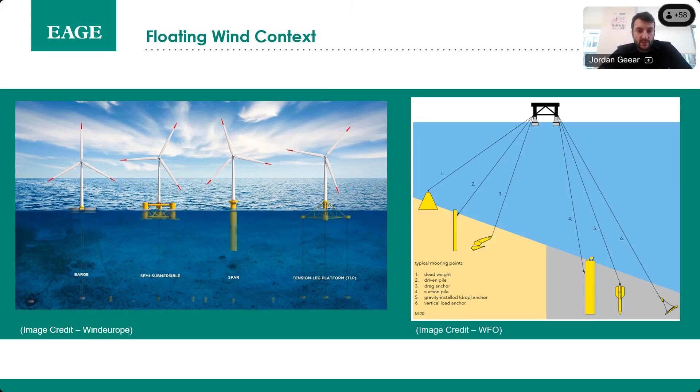So what are the specific challenges for characterization of the ground for floating wind? Potentially there's much greater heterogeneity in the ground conditions over a mooring footprint than there would be over, say, a typical jacket footprint for fixed wind. There's also a significant increase in the numbers of individual foundations or anchors, relative to piles for fixed wind, and these are much further apart than they would be for the equivalent fixed wind. As mentioned, there's significant optionality seen in mooring configuration, mooring radius, and anchor type, and this is only potentially going to be defined well into FEED or detailed design, so late project stages, and therefore specific infrastructure locations will not necessarily be fixed until later in the project, at which point it becomes more program-critical to plan the GI and execute it efficiently.

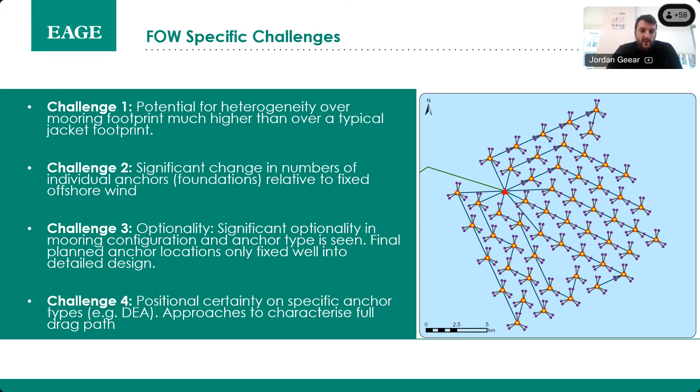There's also potentially more limited positional certainty with specific anchor concepts. So anchor concepts such as drag embedded anchors, DEAs, have a drag path over which the anchor is installed, and there's a need to characterize large volumes of ground to fully characterize, for instance, these drag paths, or volumes of ground for anchors that have lower positional certainty during installation.

There's also a challenge around existing best practice in the industry and how this relates to scaling of projects. Most of the existing best practice for geotechnical site investigation for floating offshore wind is conceived from existing oil and gas experience. There is developing best practice, certification body recommended practices that are looking at this as part of industry projects.

However, the current written recommended practices typically advocate an anchor-specific approach. So the number of exploratory holes or cone penetration tests that are conducted to characterize the ground at anchor locations are dependent on soil variability across the anchor pattern, according to the current standards.

These recommended practices typically advocate either one borehole or one cone penetration test per anchor in areas of high potential geological variability. Potentially, if we can determine that an anchor cluster - a pair of anchors or multiple anchors within a cluster - is in an area of lower geological variability, we could adopt one borehole or one in situ test per cluster, supported by the ground model, which characterizes the ground conditions over that cluster and confirms limited geological variability over that body of ground.

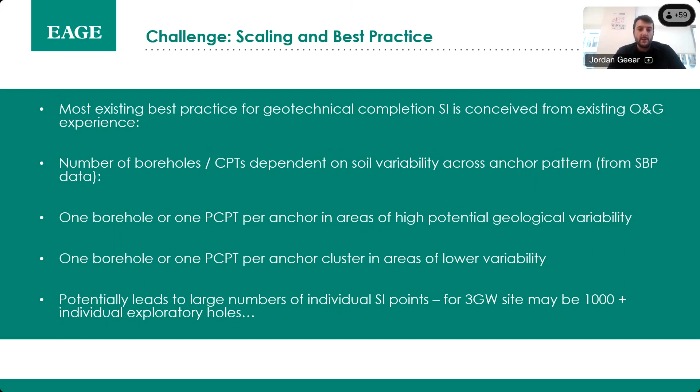Touching upon heterogeneity in the ground conditions: for floating wind, there's a large number of individual anchor points and individual substructures, if you like, versus fixed wind. Within, say, a typical jacket substructure, we'd be interested in ground variability over a 30 metre by 30 metre area, or up to 50 metres if we're looking at micrositing the structure.

Within a spread mooring footprint, we're interested in a 1 kilometre radius, which would potentially have 6 anchors within that radius. So we need to understand in great detail how the ground conditions vary over this footprint, and certainly over a cluster of anchors.

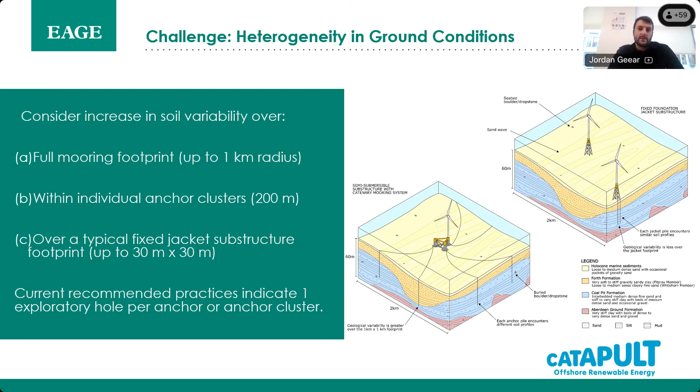I mentioned again optionality. What we're seeing with current floating wind projects is that significant optionality may exist in both the anchor layout and the inter-array cable layout until relatively late stages in the project, driven by the mooring layout and the analyses that inform this. Final layout may be defined late in the project, during FEED or detailed design, limiting the time available to plan, procure, and execute an anchor or cable route specific geotechnical survey.

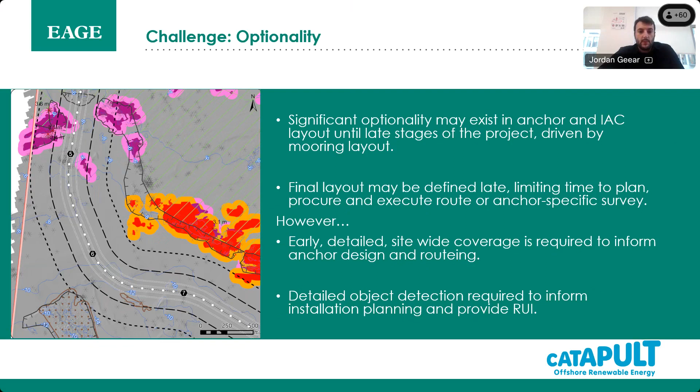So a lot of the potential solutions to this involve potentially greater reliance on the use of geophysical survey and ground models, to move away from large numbers of exploratory holes or in situ tests.

This approach would involve generating a detailed site-wide ground model at a relatively early stage, then extracting soil profiles at anchor locations using site-wide geophysical survey that's been calibrated at locations disparate to the anchor locations we're interested in. This may potentially be required to enable that optionality at a later stage and be resilient to changes in anchor location later on in the project.

Potentially, we could also look at reducing our reliance on physical sampling, which has potentially long lead times associated with laboratory testing, and focus more on in situ testing. We also need to be cognizant that, while project program and cost is a factor, we need to satisfy ourselves that the selected site characterization approach accommodates the project program while being appropriate to the level of ground risk and the project's tolerable level of ground risk in particular.

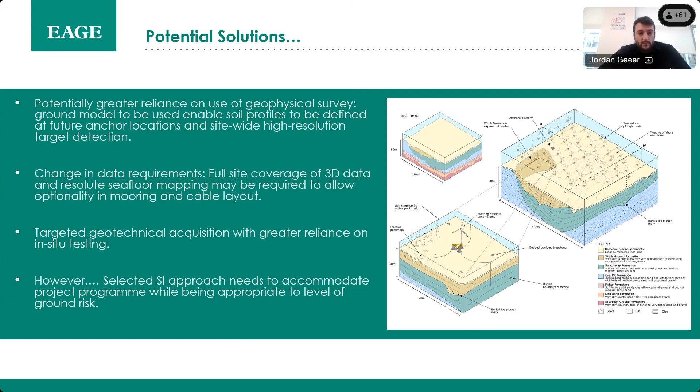So that was an introduction to general challenges. I'm now going to move on to presenting a summary of the site investigation anchoring MA17 project that was delivered on behalf of Offshore Renewable Energy Catapult, with the aim of investigating these challenges and developing potential solutions through a cost and risk assessment based approach to site investigation planning.

Before I start on that, I'd like to say a few words about the Floating Offshore Wind Centre of Excellence that initiated the project. This is a collaborative program between industry, stakeholder, academic and supply chain partners, aimed at accelerating floating wind projects, assisting with the commercialization of these projects, and supporting strategy around delivering net zero and driving economic growth.

This is achieved by developing a series of strategic programs in collaboration with Offshore Renewable Energy Catapult and the organisations shown on the right-hand side of the screen. This covers a number of different strategic programs such as mooring technology, substructures, dynamic cabling, environment, and supply chain. The MA17 project forms part of one particular program initiated by the Centre of Excellence.

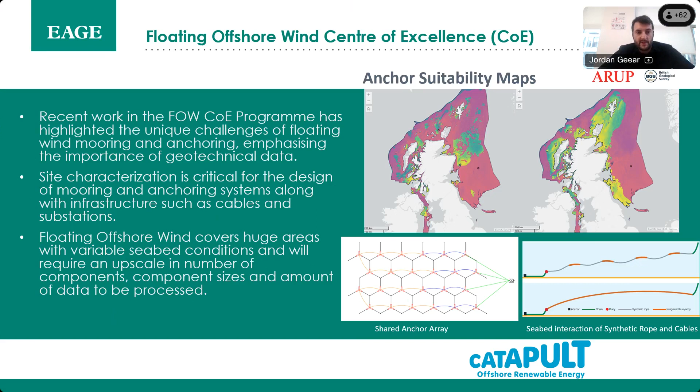So the scope of the MA17 project was to undertake a detailed site investigation method assessment to look at what methods are available for characterizing anchor locations and cables, scrutinizing the efficiency and practicality of those techniques, and undertaking a SWOT analysis of strengths, weaknesses, opportunities, threats for those methods. I won't focus so much on that aspect of the project today.

However, the other aspects of the project were to undertake a cost risk evaluation of different GI strategies, so assessing the balance between GI cost and the technical sufficiency of that to the project.

The project also looked at clarifying logistics, so understanding what vessel types were available in the market, the workability associated with the techniques, equipment costs associated with this, and project timelines.

This was done both for standard GI techniques, but also for novel site investigation techniques. We were particularly interested in looking at how novel techniques could assist in addressing these challenges, and aimed to clarify the understanding of those techniques and their limitations.

As part of the same project, we looked at a range of ground conditions associated with the UK continental shelf, and identified specific geohazards and geoconstraints that are relevant to those techniques and to SI planning for floating wind.

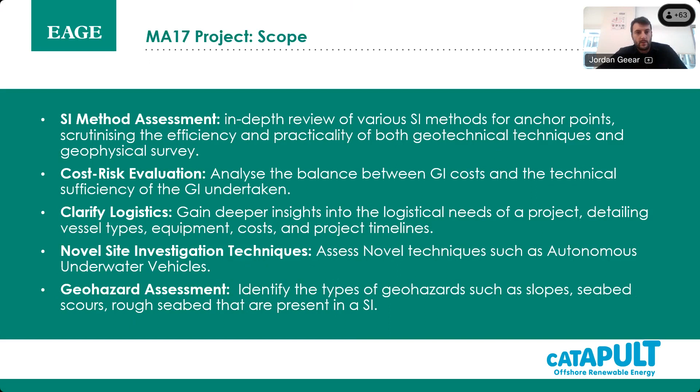So how did the project undertake this? The approach adopted was to develop a series of conceptual ground models and indicative anchor geometries for 5 hypothetical floating wind farm sites that represented different ranges of ground conditions across the UK continental shelf. The aim was to bound the range of ground conditions and look at different potential levels of ground risk, different geohazards, and also to look at sites representative of different anchor technologies and the site investigation requirements specific to those technologies.

At that point, there was an exercise in developing a series of strategies appropriate to each site, again covering different levels of risk, different program and cost levels. These range from anchor-specific GI through to approaches more reliant on the ground model and general site-wide characterization. The project also looked at minimum viable site investigation approaches and site investigation approaches specifically for TLP.

These strategies were then modelled to understand duration, cost, and weather workability of each strategy and each technique within that. They were also risk assessed with respect to technical risk and program risk, and this was then formulated into an overall cost program risk evaluation for each set of strategies.

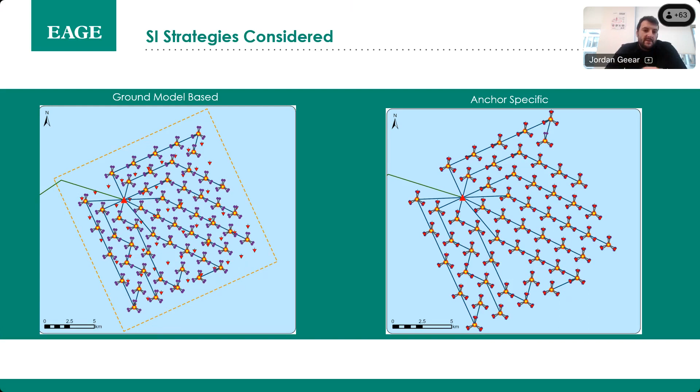Now, as an engineering geologist, I like to relate everything back to the outcrop. Another thing we looked at and bore in mind when doing this project was assessing the variability. As I mentioned, those conceptual ground models for each site were designed to represent different levels of variability in ground conditions and sensitivity to different anchor concepts.

So we looked at the range of conditions, from those that we expected to represent a low degree of variability in soil type, strength, and compressibility, to ground conditions where there was expected to be industry experience available to assess potential variability, including from oil and gas experience, and sites where there was expected to be more predictability in geotechnical properties.

At the other end of the spectrum, we have sites where there would be expected to be significant lateral variability in soil over mooring footprint, potentially active geohazard processes, and also low levels of experience previously in the industry with respect to anchoring techniques.

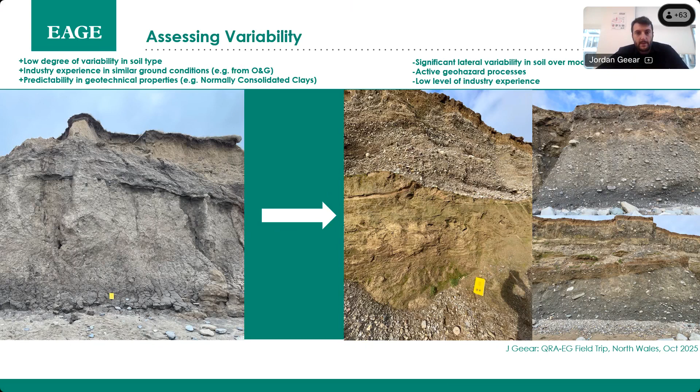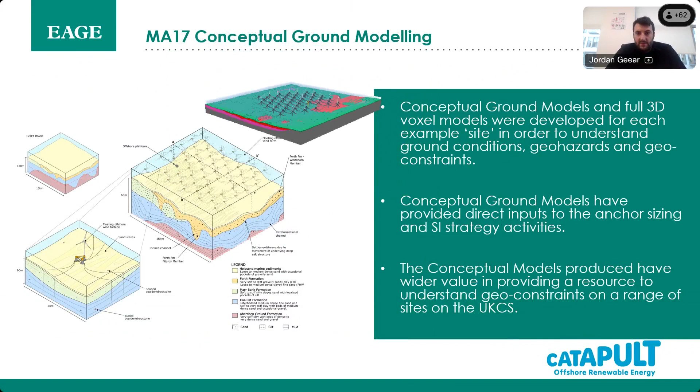So for each of these 5 sites, we developed a conceptual ground model shown on the left, so we could understand variability across both the site and the anchor footprint from a conceptual standpoint. We assigned indicative ranges of properties to that to enable anchors to be sized on a hypothetical basis to inform the study.

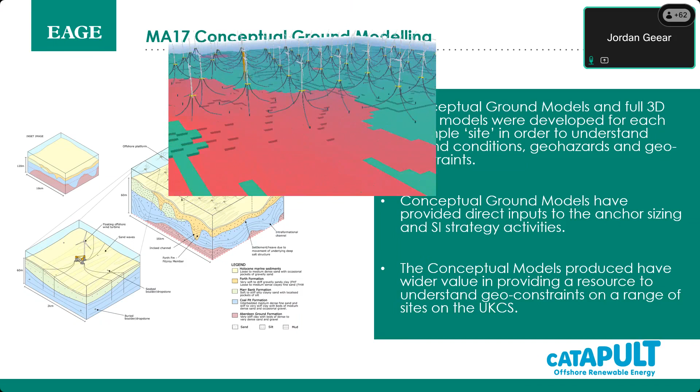We also developed a 3D voxel model for each site to enable that variability to be visualized as well. These conceptual models have both value in understanding the ground conditions for the study, but also I think they have a wider value in providing a resource to understand geoconstraints on the UK continental shelf.

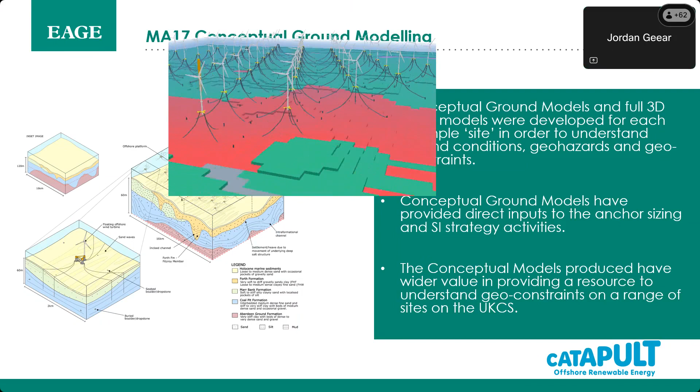In addition to development of the ground models, each site was assigned a hypothetical layout for a floating wind farm site, based around a 1 gigawatt floating offshore wind farm site. This was developed both for semi-sub and for TLP substructures over a range of metocean conditions, to allow visualization of exploratory hole and survey planning against the ground conditions as an input to cost-risk analysis.

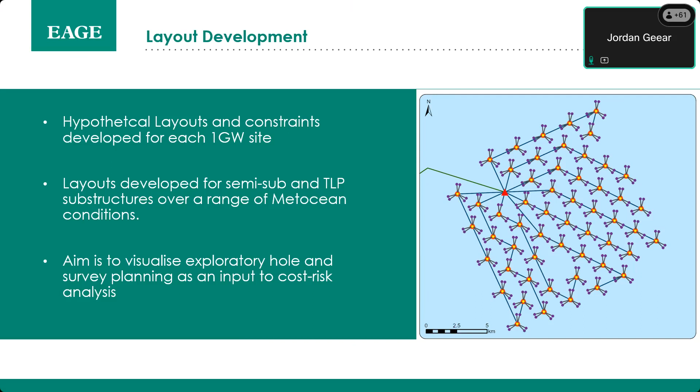So, as mentioned, the substructure type and the anchor concept has a significant impact on the ground investigation planning for floating wind, but also the point in the project program at which these are defined has an impact as well.

So if the project is able to define early on that, say, a tension leg platform approach is going to be used, then there's an opportunity to take a more site-specific approach early on and understand ground conditions at each cluster location in a similar manner to fixed offshore wind, with the borehole positioned in the centre of the anchor cluster and targeted to your 3D geophysical survey.

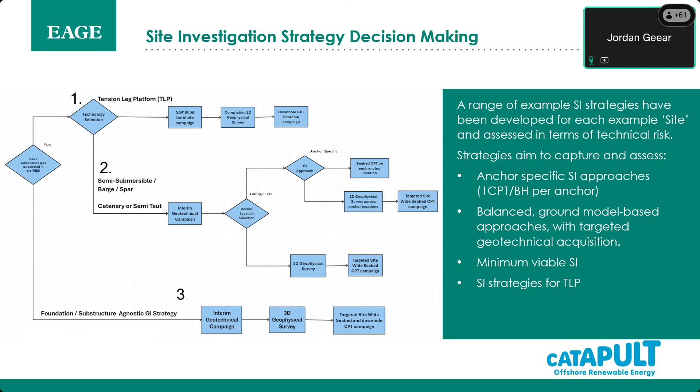So based on the experience of the ongoing projects at the moment, we've noted the following aspects of optionality that have informed this study: potential for changes in mooring radius, anchoring and anchor location at FEED or detailed design stage, and multiple substructure concepts being carried through, for instance at FEED stage, which results in more optionality.

Use of an EPCI approach, which means there's more requirement for the project to provide early GI information, to provide reliable information, and of course multiple anchor concepts being considered at late stages, which results in the GI needing to capture all of these anchoring approaches.

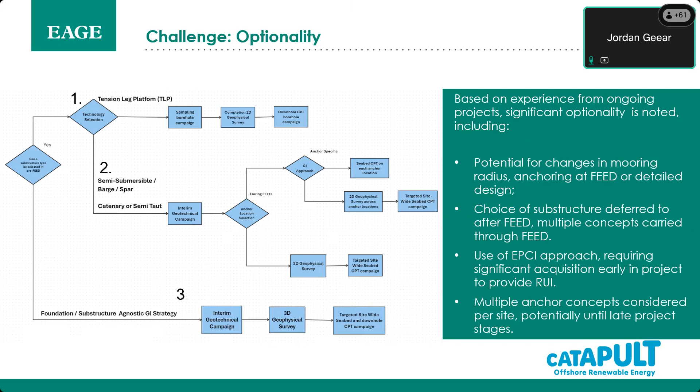So what are the solutions to that optionality with respect to the work done on MA17? Just to note that strategy is dependent both on program and decision gates, as well as ground conditions and ground risk.

Potentially seeing a lot of variation in mooring radius across these planned floating wind projects. Typically for the current UK continental shelf floating wind farm projects that are planned, we're looking at radii between 650 meters and 950 meters for the water depth we're expecting.

The mooring radius is defined later on, so we need a solution that enables us to plan GI and plan and design anchors that is able to deal with this uncertainty in location.

The overall approach will be dictated by the variability of the ground conditions and also the anchor sensitivity to this uncertainty, when we're considering a ground model-based approach rather than an anchor-specific one.

An underlying assumption of this project is that some level of physical data of each anchor location, be this geophysical or geotechnical, will be required to form more sensitive anchor concepts to enable design to proceed.

One potential solution that the project looked at is the efficiency of undertaking site-wide 3D UHRS, or EHRS to use the latest terminology, to allow ground profile definition of each anchor location while retaining optionality and maintaining a design program.

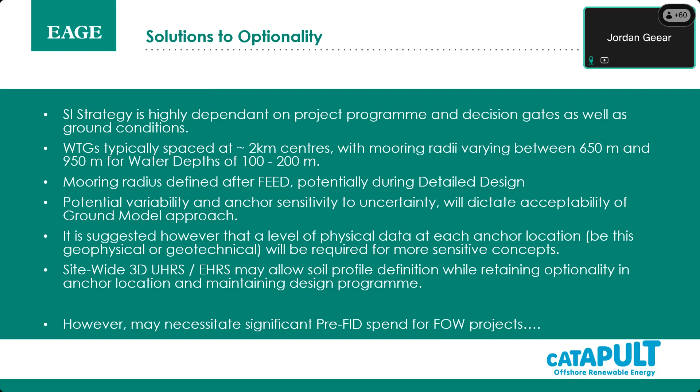However, acquiring this data on a site-wide basis early on in the project may necessitate significant pre-FID spend.

In terms of how the project programs that we've looked at have been risk assessed, GI overall needs to be proportionate to the level of geotechnical risk at the site to provide value for money and accommodate the project program.

This needs to be a balance between obtaining characterization in each geological unit when we're looking at a ground model-based approach, the ability of the ground model to provide sufficient information to enable design, and the sensitivity of the anchor and cable design to that variability. If we're able to satisfy these criteria while achieving an acceptable level of geotechnical risk management, then we can consider the site-wide GI approach.

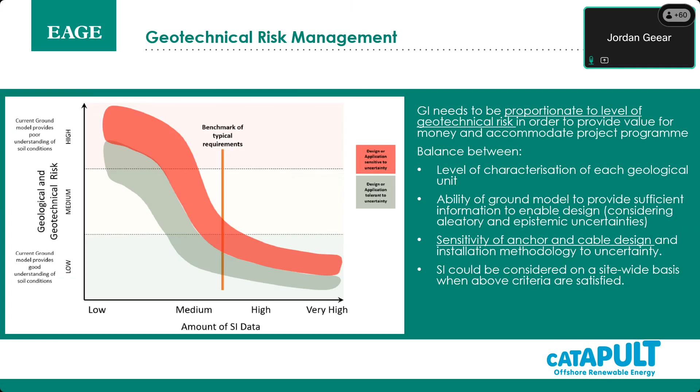So the overall high-level risk assessment approach on the project: a specific geotechnical risk register approach was developed in the project to enable this. This then defined ground variability in the context of those 5 sites.

It defined industry experience in those ground conditions, confidence level associated with the data that was collected, and sensitivity level of the anchor concept that was being considered for each site.

This was then fed into a risk matrix, and the SI approach was rated based on that. Higher risk sites were those where anchor-specific GI may be more appropriate, and low risk was where site-wide, ground-based GI approaches may be more appropriate.

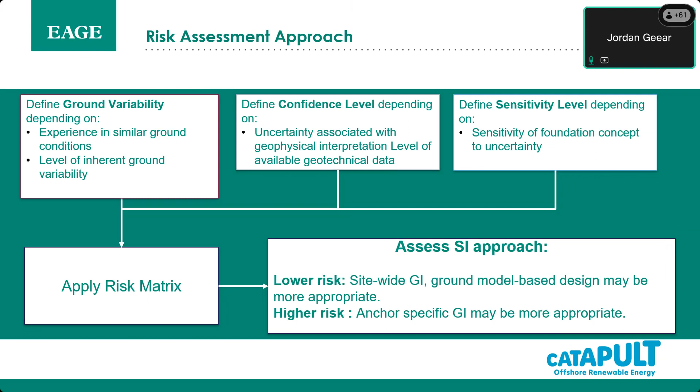I'd like to also give a bit of a shout out to this paper from ISFOG 2025, which, while being developed separately from this project, follows a very similar approach. So it's well worth a read.

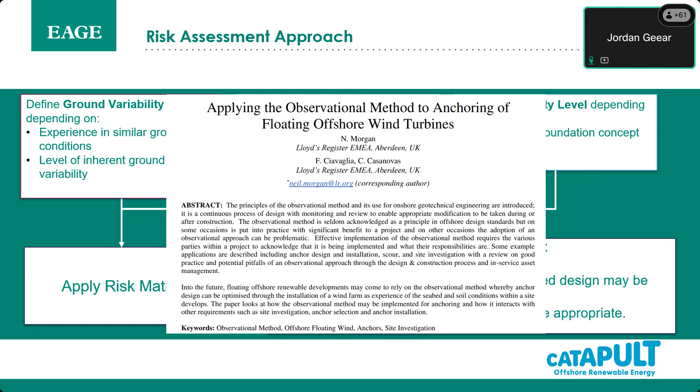This risk assessment approach is the one used for the MA17 project that was adopted. You can see this is broken down into sensitivity class, variability class, and uncertainty level, and this tripartite risk assessment approach forms the basis of that adopted on the project.

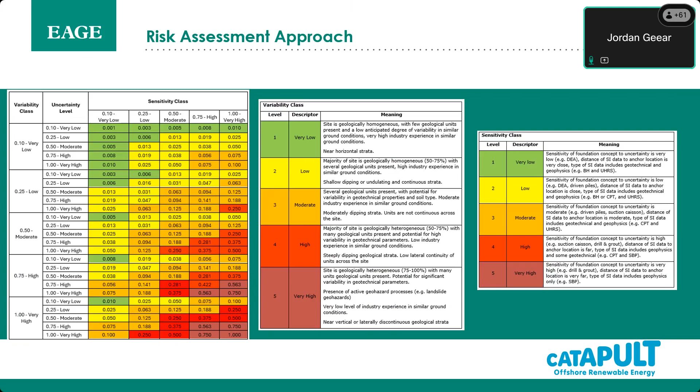Each of the techniques was analysed using Maritime's Optim software to look at program across a variety of start months and to analyse weather downtime estimates. Comparative assessments were then made between different techniques to look at the efficiency of using one technique over another, as well as putting these into the context of a project program.

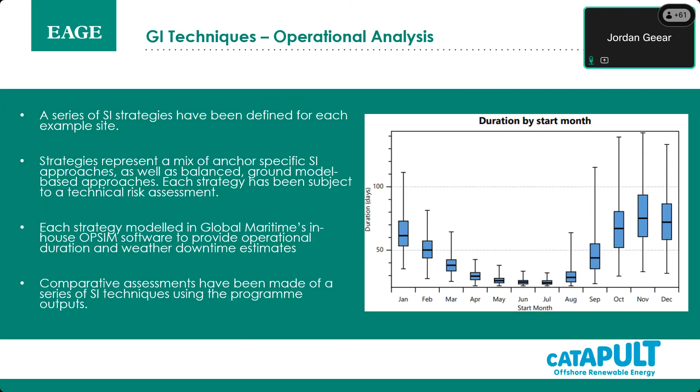One particular technique that was looked at, or problem that was assessed, was the need to understand seabed obstructions across the site, to look at the need for pre-clearance prior to cable burial.

Feedback we obtained on this was that objects as small as any size of boulder, so down to 0.2 meters, may represent obstructions to mechanical trenching depending on the lithology, and that there was a need to have optionality in cable route and data sufficient to plan cable routes with this in mind.

This necessitates quite detailed coverage essentially early on in the project. So we looked at the efficiency of using industry standard techniques such as side-scan sonar to characterize this, as well as synthetic aperture sonar and other more novel or emerging techniques.

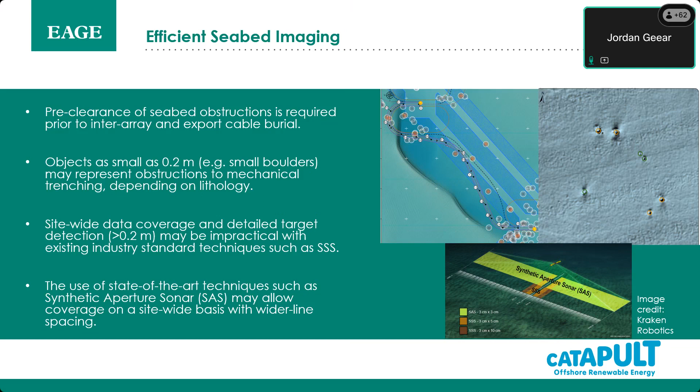So what you can see is that side-scan sonar is required at much tighter line spacing for the same resolution.

So we can compare based on the ability to detect a 0.2 meter diameter obstruction. This means a 600 kilohertz or 900 kilohertz side-scan sonar needs to run a fine line spacing, so 50 meters or less primary line spacing, versus synthetic aperture sonar, which can be run at potentially much wider line spacing, so 100 to 200 meter line spacing across the site.

What you can see from that plot is that the sail line spacing heavily influences duration, as you'd expect, and therefore the weather downtime as well. You can see that while side-scan sonar to obtain that site-wide coverage early on results in significant durations in the winter months, as you'd expect, the limiting line spacing by using that more emergent technique results in significantly shorter durations.

However, an aspect of this is that the use of synthetic aperture sonar results in much larger data volumes, and potentially the overall processing experience and software readiness level for that technique needs to be further developed in the industry outside of a small number of specialist contractors. As you can see, this also has a commensurate impact on cost.

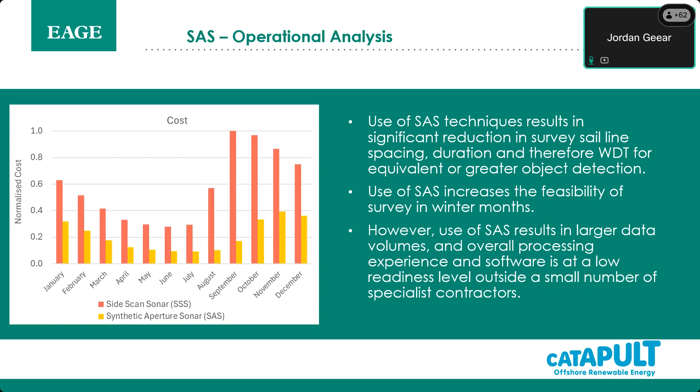As I say, that kind of fairly ground model-based approach, the use of site-wide 3D survey is of potentially significant benefit to enabling that approach in terms of understanding ground variability across anchor clusters, at the sort of turbine scale.

However, the industry standard 2D approaches introduce potential uncertainty between the lines through the mathematical interpretation required, which may limit the utility of this for the ground model-based approach to design and installation, unless your anchor concept is particularly insensitive to variability.

The full site approach provides resilience to layout change. It provides the opportunity to decouple the GI program from the definition of anchoring layout, and potentially to then take a ground model-based approach to design, which is decoupled from the site scaling program.

However, clearly there's a need to look at cost and efficiency of this technique. In the offshore industry to date, there's limited deployment of this technique at this particular scale, the site-wide scale.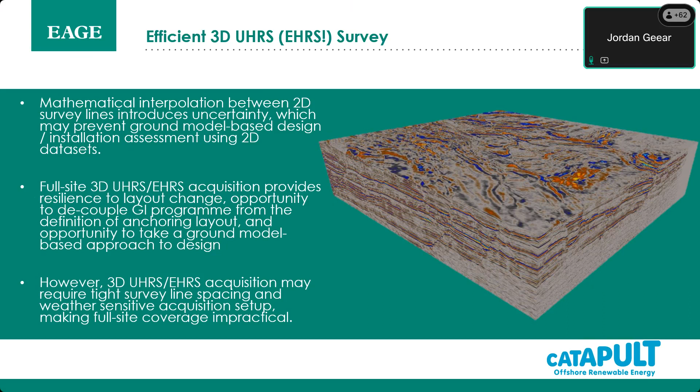What the comparison that was undertaken for the MA17 project was looking at is essentially a comparison of 3 different subsurface techniques: 2D single channel seismic, which is industry standard, and then what we term standard 3D UHRS approach using 2D survey vessels or assets.

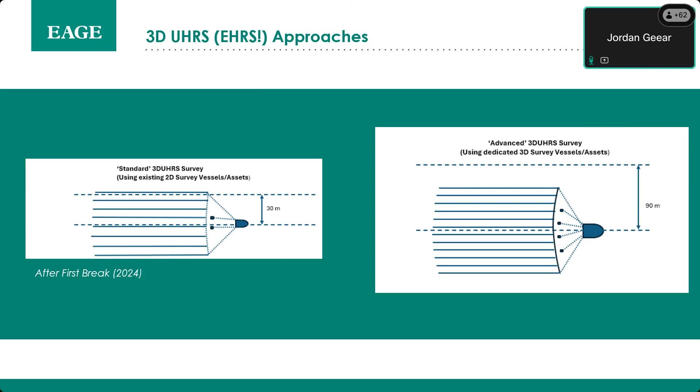So we've undertaken an option analysis looking at the comparison between these 3 approaches, using line spacings appropriate to each technique. For the 2D, we looked at a typical approach, characterizing with either 150 meters or 75 meters spaced primary lines across this 1 gigawatt site. We've looked at 30 meter spacing for industry standard 3D UHRS, and also looked at comparing with oil and gas 3D approaches.

The more industry standard 3D is associated with quite long durations for site-wide coverage, but this is likely more appropriate for dedicated survey and anchor locations if the project is taking that approach.

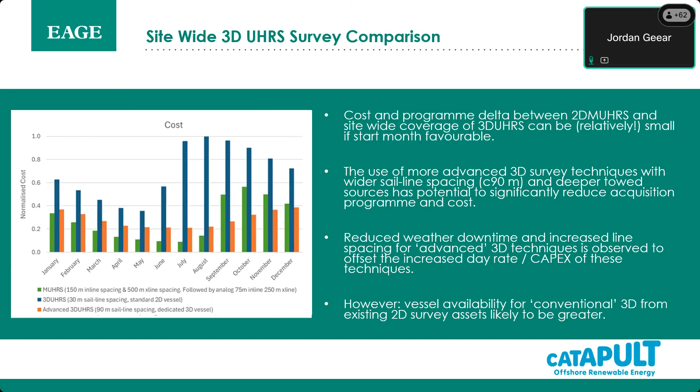Briefly touch on geotechnical investigations as well. A similar comparison was conducted for geotechnical investigation, looking at in situ testing techniques such as frame CPT, pairing with API drilling and subsea drilling for completion GI and reconnaissance. We're going to focus on the completion GI specific approach for this comparison.

For sites where seabed frame CPTs were feasible, we found as a characterization approach there was actually a very limited delta in costs between the use of the ground model based approach and the specific approach when looking purely at costs. However,

the program may dictate one or the other. Clearly the program needs to accommodate specific CPT investigation, and that might have to occur at a very late stage of the project. So the ground model based approach still gives potentially more program flexibility.

Clearly the cost and program implications of undertaking specific GI at 200 plus individual locations using industry-standard API drilling is significant, and this is limited to potentially around 20 in-region survey assets. That is also a sort of supply chain constraint that potentially needs to be considered with respect to GI planning and use of the ground model based approach.

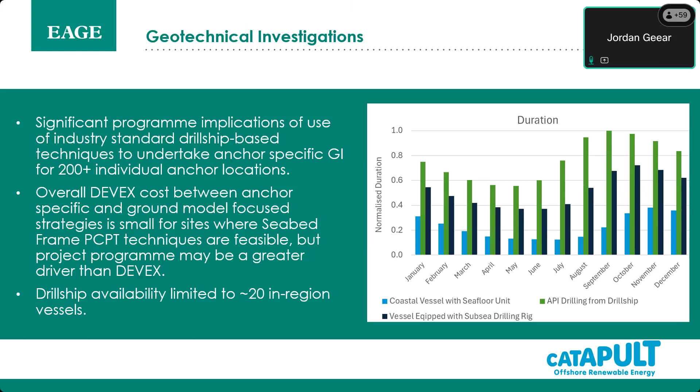So briefly to sum up, in terms of the challenges of floating offshore wind farm site investigation: positional uncertainty and optionality on the anchor and cable layout persisting to late project stages, greater numbers of individual anchor or substructure locations relative to fixed wind, and potentially greater variability in ground conditions across the substructure footprint.

A particular finding key to a successful approach is that enabling optionality is key. The project is likely to be sustaining significant optionality in substructure type, anchor location, and cable routing until quite late stage, and there's a benefit to GI being planned to enable this optionality rather than to try and work around it.

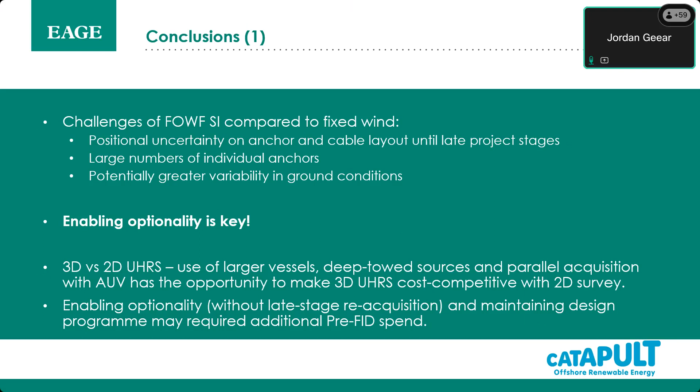Potentially there are approaches using larger vessels with deep sources and parallel acquisition with AUVs to bring durations in line with traditional 2D survey for ground model approaches using 3D data, enabling optionality and preventing late stage reacquisition of data if there are changes in the layout, while maintaining the design program may require additional pre-FID spend. That's a consideration for specific projects.

GI strategy is clearly complex and dependent on inherent geological variability in each site, as well as the project program, the risk appetite, and the substructure and anchor selection. However, we find that ground model-based approaches are, depending on the specific risk appetite, considered appropriate at many of the example floating wind sites where there was previous industry experience.

As demonstrated with the CPT-driven approach, maintaining project program may be a greater driver than the DevEx cost when considering moving away from the specific GI approaches. We found the program benefits to be a significant driving factor.

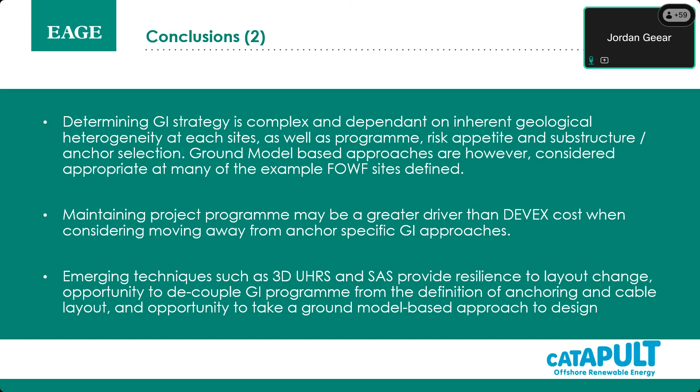Emerging techniques such as 3D UHRS, EHRS, and synthetic aperture sonar provide resilience to layout change and the opportunity to decouple the GI program from anchoring definition, cable layout, and other project milestones.

As an output from the work, the project also developed an outline workflow to guide the development of project-specific SI strategies, not intended to replace project-specific strategy but to augment it and provide guidance. The strategy considers the various influencing factors discussed in the presentation, and acts as a guide to where it might be appropriate to select one approach over another.

In terms of next steps for the MA17 project, aspects of this project will be released as a public summary report, and that will be announced by Catapult in due course.

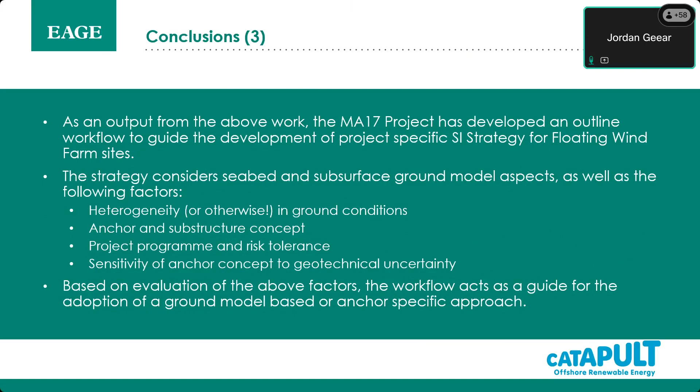Closing thoughts on developing best practice: what will need to be done to build on this work? Identification and mitigation of the sensitivity of the anchor concept to uncertainty is likely to be critical in the application of a ground model-based approach.

It's recommended to develop a site-specific approach to geotechnical risk management relative to the sensitivity and defining bounds of acceptable uncertainty. That's a key recommendation.

How would we go about doing this? I think this is an aspect that needs more attention by the industry and further assessment. Essentially you can look at the use of reliability-based design to understand what the bounds of uncertainty could be, and how sensitive the anchor is to that uncertainty. This may be more relevant for anchor types which are precise.

A brief flag for a useful paper on the observational method. This is a technique which has seen significant use in onshore construction, but perhaps more limited use in offshore site investigation and installation.

This may be relevant to anchor types where it's possible to proactively implement mitigation measures, by observing the ground during installation and then acting accordingly to put in place mitigation measures if the ground conditions differ from what is expected. This likely won't apply to all anchor concepts.

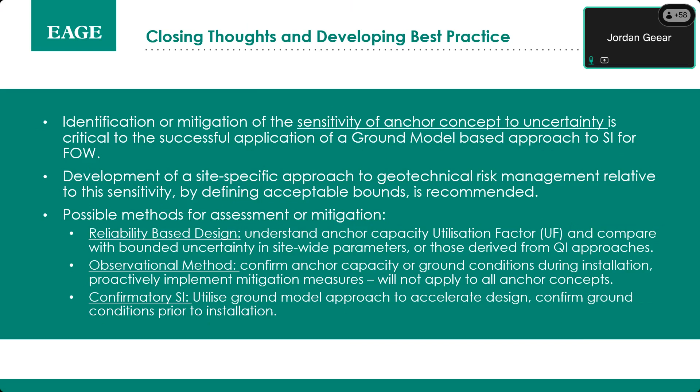Thanks, Jordan. That was a brilliant talk. It was really comprehensive. I can't believe you packed that much information into that amount of time. And I really loved the field photos squeezed in as well from the QRA field trip of the soils in the wild. So really, really great summary.